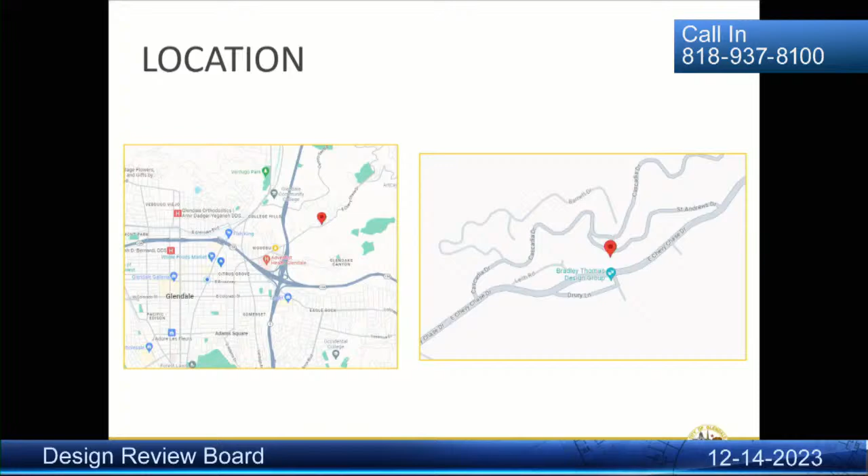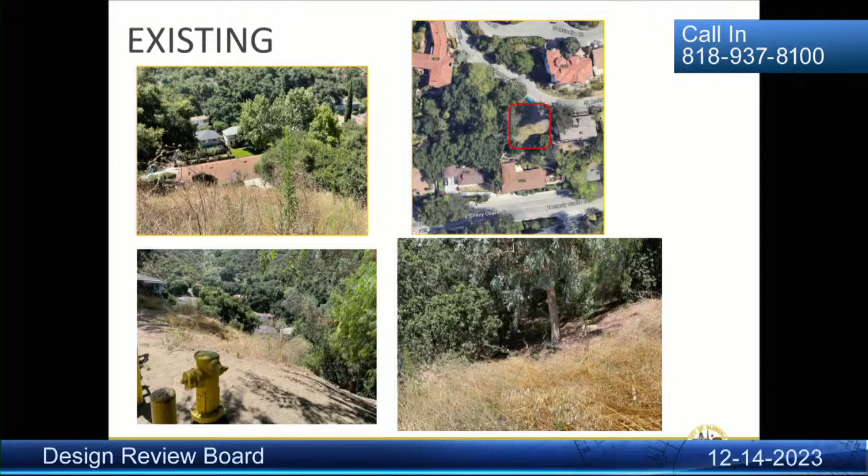As a refresher, the subject site is in the Chevy Chase Canyon of Glendale on St. Andrews Drive. It's an R1R zone, and the site has a variance to allow for construction on a substandard lot. The subject site is a vacant 6,708 square foot lot with an average current slope of 60%. It's irregular in shape and has several existing oak trees on the property.

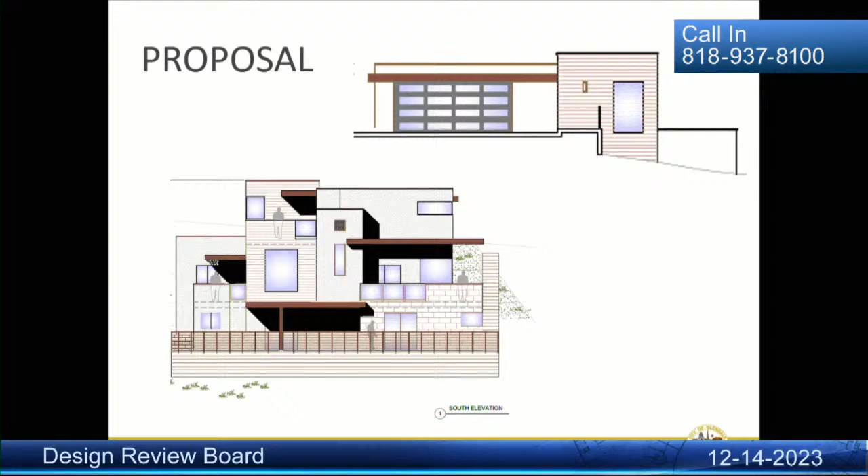The overall dimensions of the revised proposal are the same: one new 2,010 square foot, 3-story, single-family house with an attached 2-car garage. Site improvements involve grading 375 cubic yards of cut, 400 cubic yards of fill, 25 cubic yards of import, and 3,060 square feet of open ungraded space. There will be a 5-foot-tall retaining wall at the southern end of the property, and you may remember there were 3 to begin with. The project is exempt from CEQA.

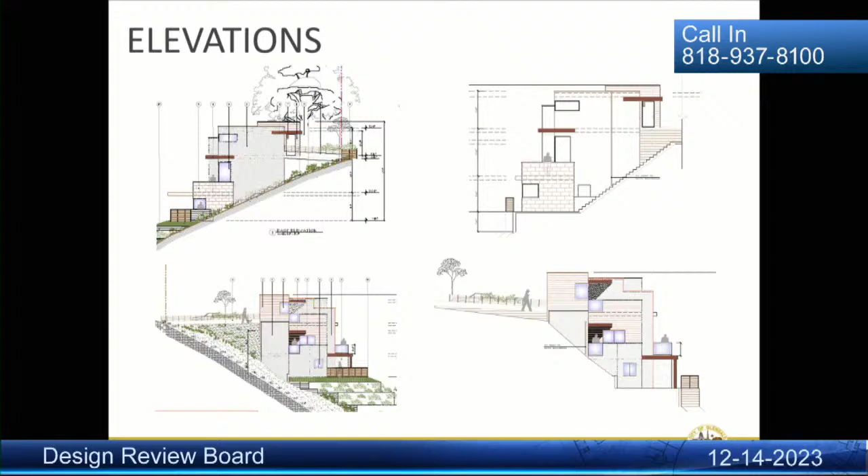The side elevations have no visible changes made. Here's a side-by-side of the previously reviewed floor plans and the revised ones. I know you can't see these in great detail, but this just shows that very little has changed in the floor plan.

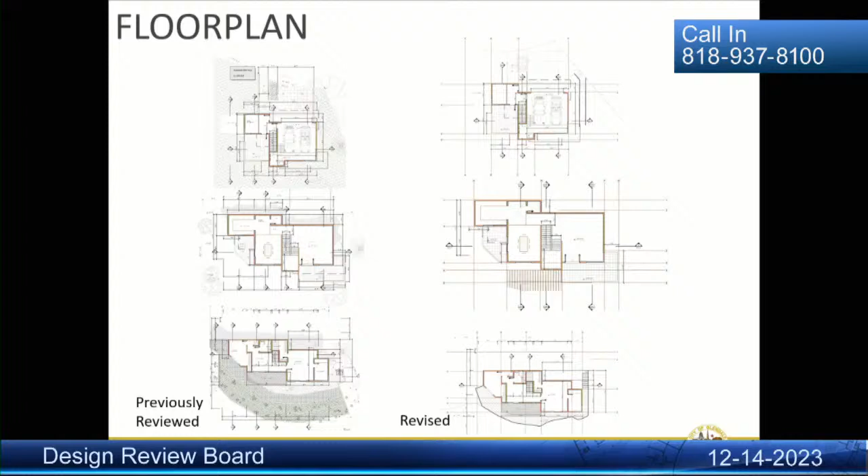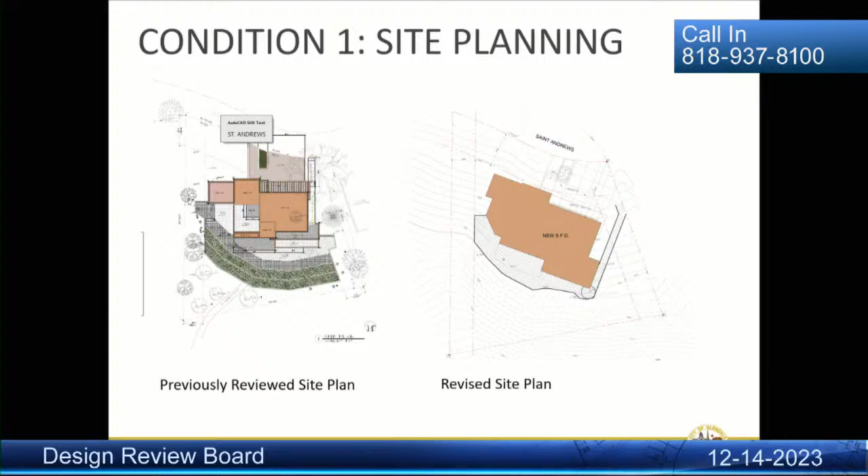We can talk a little about the first condition regarding site planning. The first condition was to rotate the building placement towards the street, reducing the grading and number of proposed retaining walls, and reducing overall mass and scale. Here you can see the previously proposed site plan on the left and the revised site plan. The building footprint has been rotated about 10 degrees towards the street and now sits closer to the 15-foot setback line. The grading plan has stayed the same, and here's the elevation drawing showing the reduction of retaining walls at the rear.

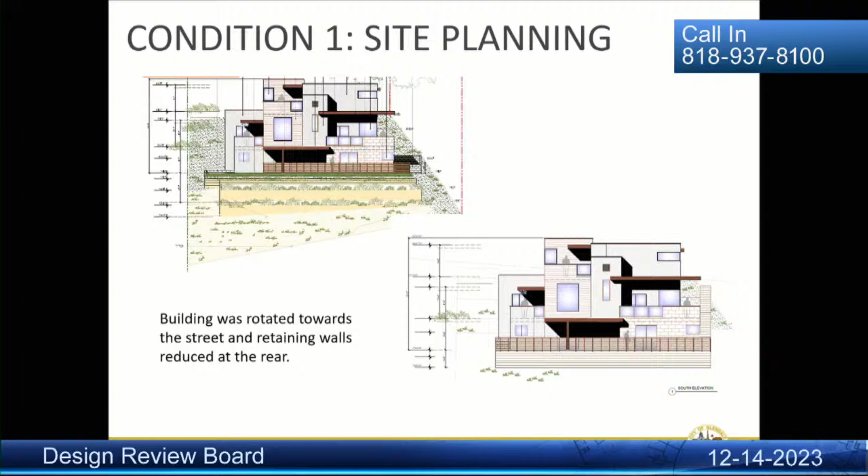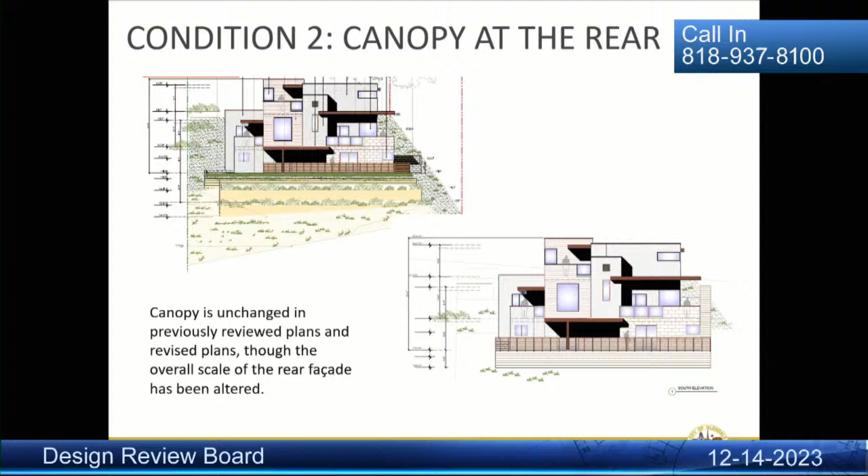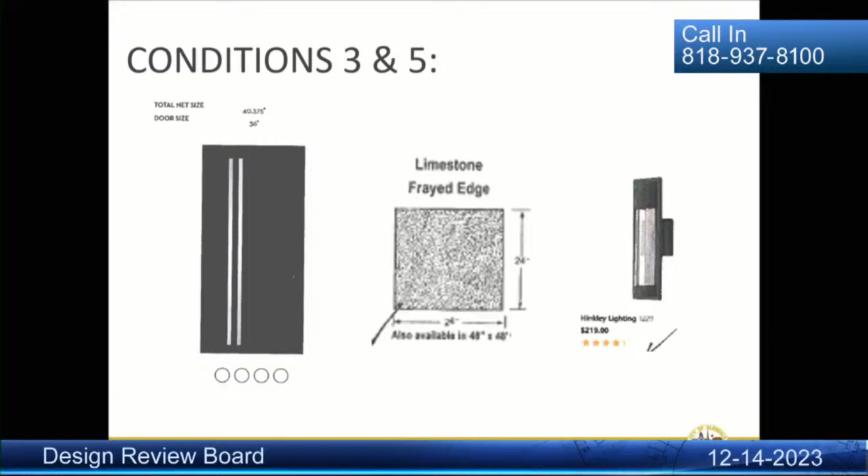Moving on to conditions 3 and 5, which were requests for cut sheets, we have the door here, the decorative paving, and the lighting. Staff included a recommendation to maybe choose a different paver material, but we believe those conditions have mostly been met. I did not include conditions 4 and 6 because condition 4 is the urban forestry condition, and it's standard to include that. Number 6 has not been addressed but can be met at staff level.

Which one was number 6? Number 6 was the gutters, yes — clearly depict gutters and downspouts on the drawing and paint them to match.

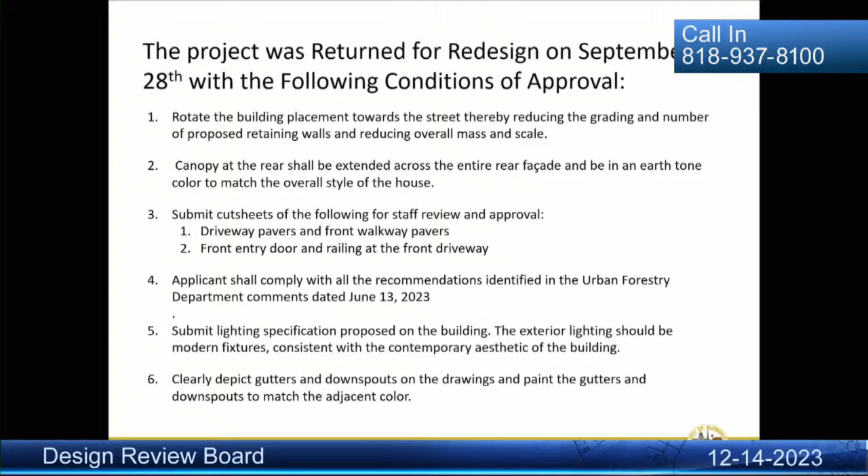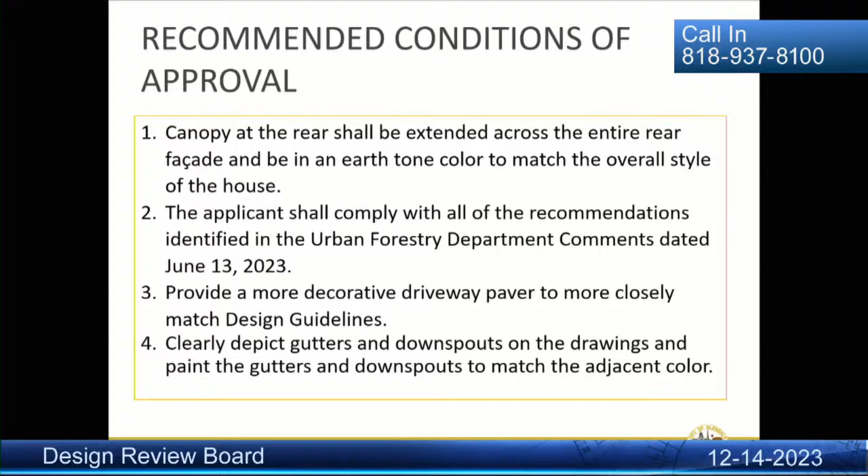We are recommending approval with the following conditions. Number 1 would be the same condition regarding the canopy at the rear, extending it across the entire rear facade in an earth tone color to match the overall style of the house. Number 2, the applicant shall comply with the recommendations in the urban forestry department comments. Number 3, a more decorative driveway paver to more closely match the design guidelines. And number 4, again, clearly depict gutters and downspouts on the drawings. That concludes my portion of the presentation.

Thank you. Do we have any speaker? You have a question? Yes, go ahead. Thank you, Mr. Chair.

With the new proposal, I didn't get the last figure. It was 375 cubic yards of cut — yes, I believe so — and 400 cubic yards of fill. What was the export with the new calculations? Let me see if I have it in front of me. 25 cubic yards of import and 3,060 square feet of open ungraded space. So 375 cubic yards of cut, 400 cubic yards of fill, and 25 cubic yards of import.

And with the previous submittal, what were those figures? They were the same. With all the retaining walls being removed, how could it be the same? Well, I think the applicant could explain this better than me, but I think he was planning on filling in the area where the driveway bridge was with some of that dirt.

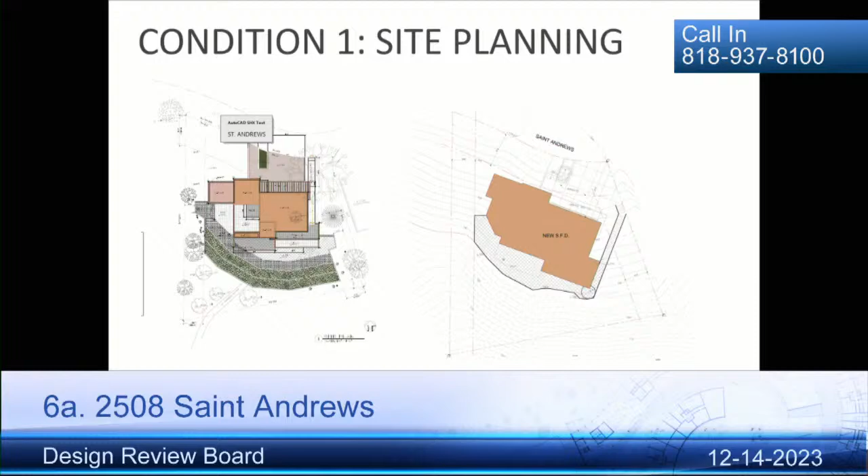On sheet 2.3, one of the plans staff had on the board had a hatched portion at the bottom — I think it was a comparison of the floor. So on the revised site plan on the right side, what is that hatched portion? I think that's the deck type area, the outdoor space. And is that area on grade, more or less? Yes.

In regards to the site plan that depicts the location of the house with the contours and spot elevations — I think I know the answer is no — has one been submitted with the new site plan, with the proposed design as rotated? No, okay. All right.

Thank you. Any other questions? Yes — perhaps it was in the original set of plans, but I didn't see a window specification listed. It is in the original set of plans, but because it didn't come up as a condition, I didn't think to include it, but I can pull it up if you'd like to see it. If it wasn't a condition before, I'm sure we evaluated that previously. Thank you. Sure. Any other questions? Nope, all right.

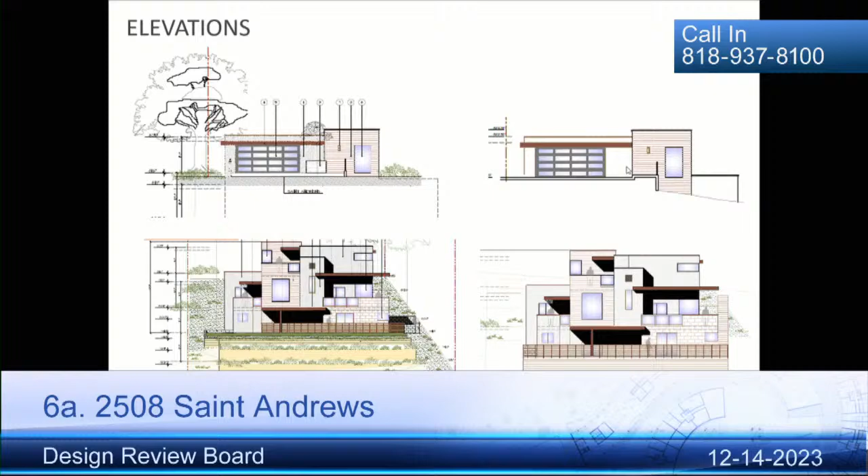It's a little hard to see. The flat roof shows the downspout right there. No, go a little further. Yeah, right there. That seam, that vertical line, is the downspout.

Okay, and you also mentioned the drainage is coming towards the house down the driveway? Yeah, it's a continuous gutter across the driveway. I'm sure that's something you'll explore with building and safety, but I'm wondering how you're getting the water up and away. That's one of the reasons why the building was sitting up, so it will avoid that.

And then in terms of windows and materials, they weren't provided in this submittal, but I'm assuming you're being consistent with what you provided previously. Is that correct, that they will be of the same quality and specifications? Okay, thank you.

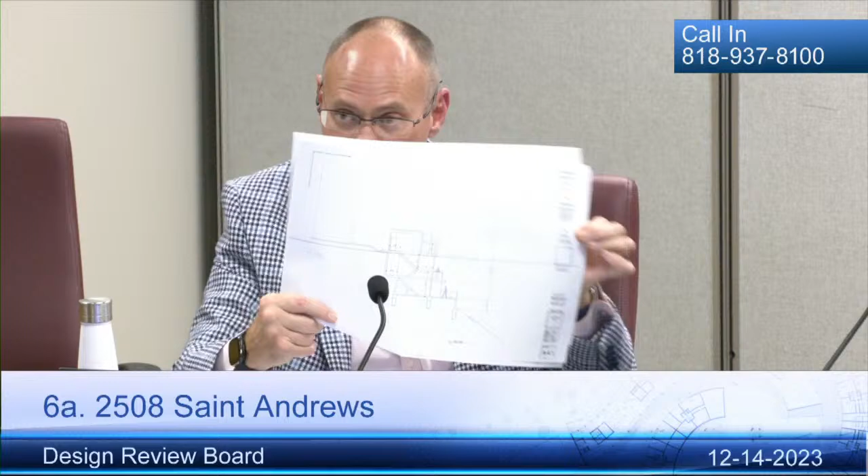This, I think, is the closest that we've got, is this section here that cuts through. But there's no dimensions on here in terms of elevation along the site, no lines showing the natural grade going through here so we can see where that would be cutting through the entire section.

Yeah, almost like you need a preliminary grading plan. To go to a civil engineer and ask for a preliminary grading plan, where they spot the top of wall and the bottom of wall. Understand what you're saying. I just want to point this out on comparative elevations, side by side.

The revised elevation, you see, it's cut right through. The only thing that is missing is the actual existing grade dash line as it cuts across the building. I mean, it could be anything.

That's what we're saying, for us to bring the only information on there is a preliminary grading plan by a civil engineer that locates the walls, locates the house, that does a cut and fill drawing with different colors, shows the cut, shows the fill, shows the import, shows where the dirt's going, actual tabulations, cubic yard calculations of how you're storing the dirt.

It's work. It's not just taking the elevation and a section and saying, this is it. It's depicting the data on a set. And that's what we asked for last time, and I could tell there was some miscommunication because you're still asking questions as to what we're looking for.

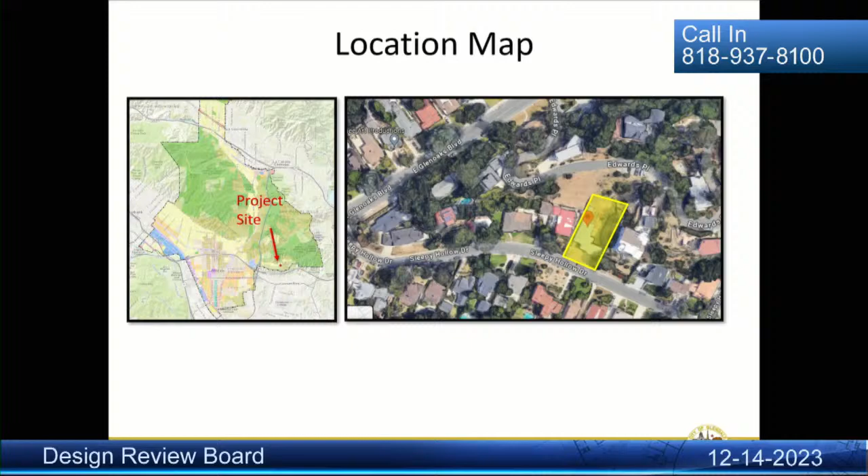The applicant proposes to demolish the existing one-story single-family dwelling and construct a new two-story, approximately 3,400 square foot single-family dwelling with an attached street-facing two-car garage. At the rear will be a detached 749 square foot accessory dwelling unit, which is not under the DRB's purview this evening.

Overall, the building's site planning will comply with all setbacks of the R1R development standards. Overall, the site plan is supportable by staff with two recommendations. The first being that a landscape plan be provided for staff review before building and safety plan check.

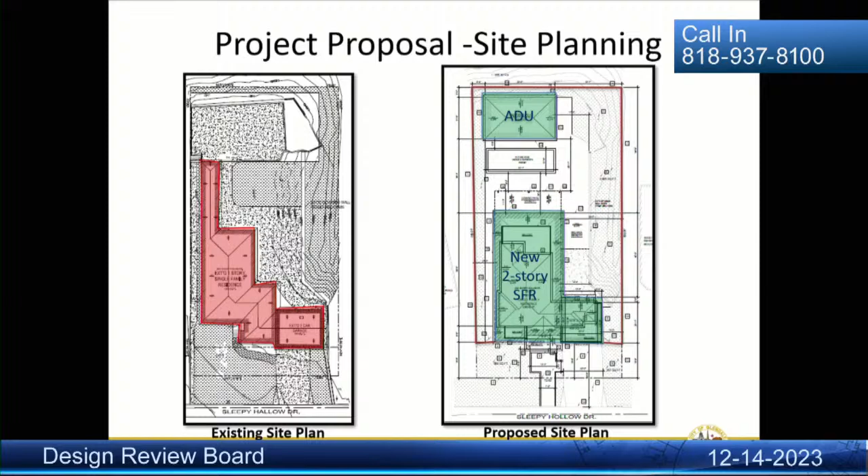The second condition in terms of site planning, as you may notice on the screen highlighted in red, there will be a perimeter fence around the lot. It's a wooden fence. Staff recommends setting back the street-facing portions approximately 1 foot from the building's facade. Just to give you a visual of what I'm trying to clarify, this is the rendering, and they have the fence there.

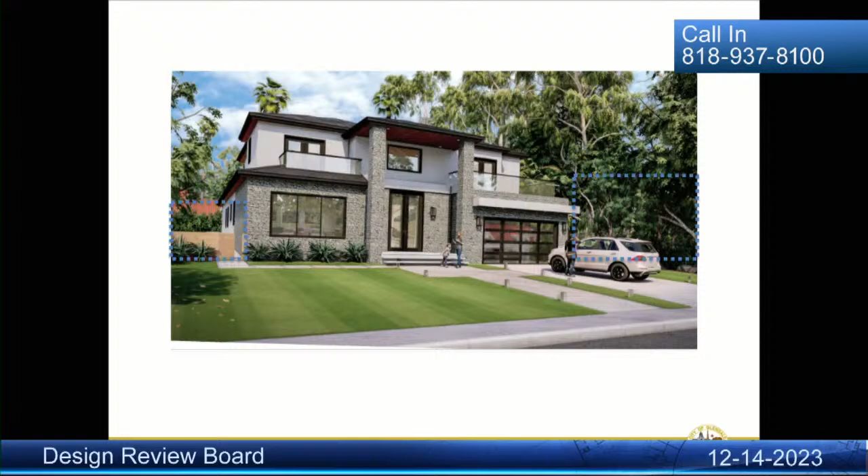Even though the rendering does show a very short wall, I imagine it can be taller. Staff is just recommending to set back these fences - on the driveway side they're not showing the fence, but we'd set this back maybe a foot to break up that elongated long wall of building and fence that would be viewed from the street. So staff believes just offsetting it from the facade would help break up that appearance.

Moving on to mass and scale. Overall, the mass and scale of the two-story is supportable. The neighborhood consists of a variety of both one- and two-story homes.

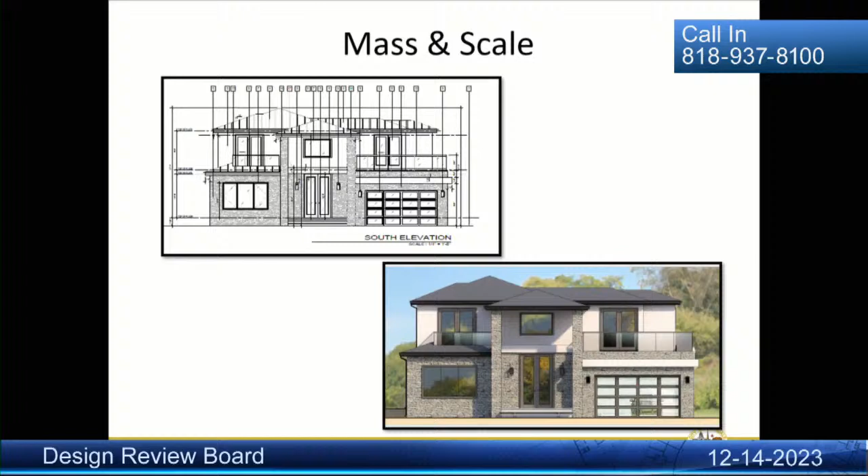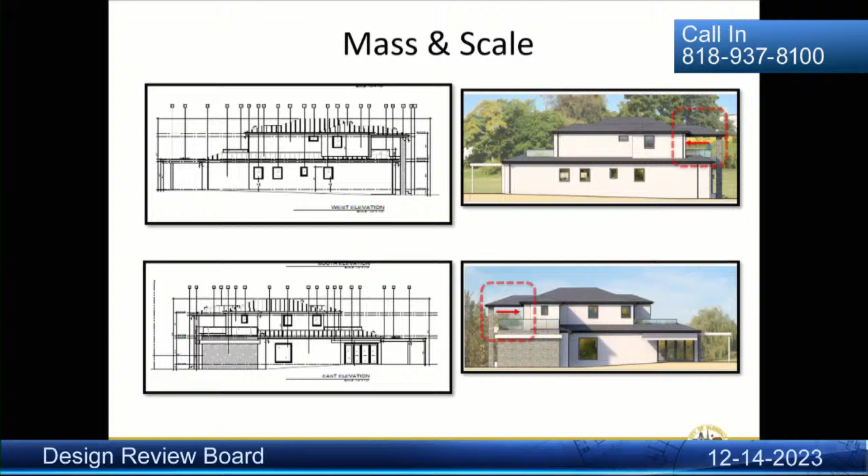To help reduce the mass of the two-story, as recommended by the guidelines, the second story of the building will be set back approximately 6 feet from the lower level. You can see from the arrows outlined in red here where these offsets are provided. Once again, this is about 6 feet - I think the dimension would be at its closest, but 6.5 feet offset from the lower level.

Onto the project's design in detail. The project's contemporary modern design will include quality materials such as a standing seam metal roof, stucco siding, stone veneer base band, and recessed nail-on fiberglass windows with fixed casement operations.

However, staff has 3 recommended conditions. The first, if I can guide your eyes to the slide here, involves the 2-story front entry, which is discouraged by the guidelines. Staff recommends lowering the front entry and the front door to be properly scaled with the design and avoid the sense of monumentality that the guidelines recommend we avoid.

The second recommendation is that the brick veneer continue and wrap around the corner along the western facade to terminate at a more logical stop, which would be towards the rear. Lastly, the applicant should show locations of the downspouts of the project, as this is pretty standard for us, and we believe we can handle this during plan check.

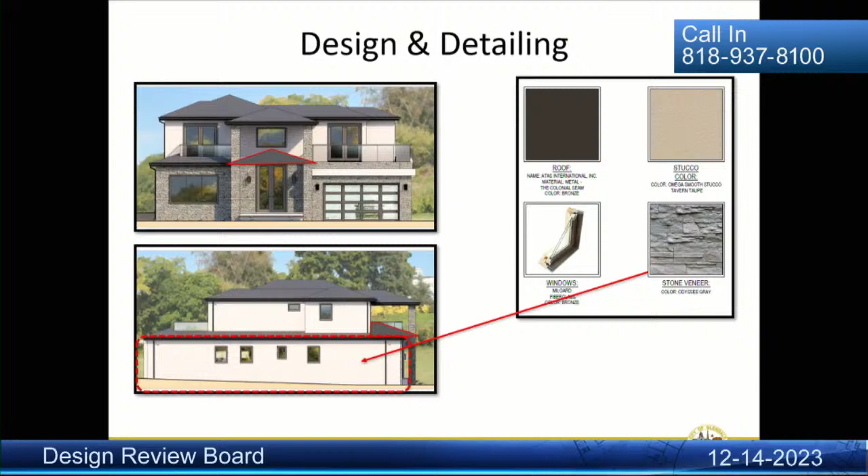Overall, staff recommends approval of the following conditions. I will briefly go over them. First, lower the front entry cover and have the front entry door properly scaled.

Second, set back the fence from the building facade to break up the long continuous wall with the combination of the fences and the building.

Third, which I didn't mention but you may notice in the rendering, paint the fence a darker color to complement the tone of the building, in lieu of the natural light color stain you may see. I know it's a small photograph here, but I can enlarge the rendering.

Number 4, have a landscape plan prior to plan check, and these plant materials should be California friendly. Number 5, wrap the brick veneer along the western facade and terminate it at a more logical location.

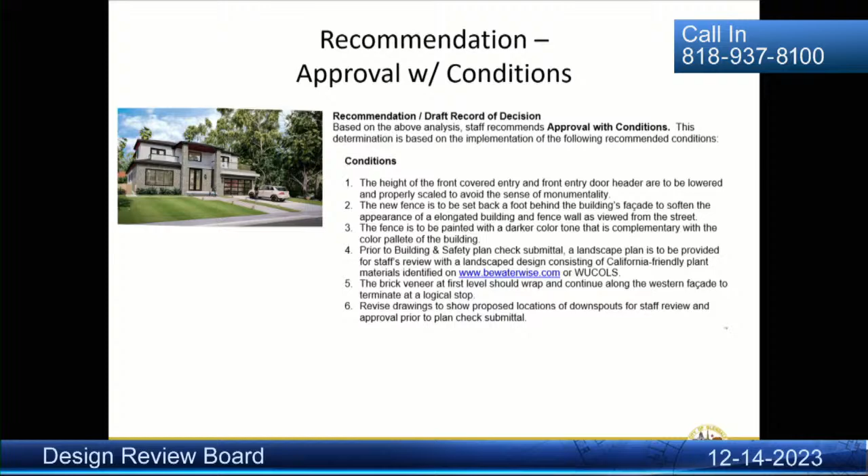And then number 6, the ever-perfunctory condition: identify the downspouts for staff's review prior to plan check. This concludes staff's presentation.

Thank you. Any questions? Just one — on this rendering I see on the front page, the stonework does appear to go down the side. So we're really just trying to make it look more like that one, correct?

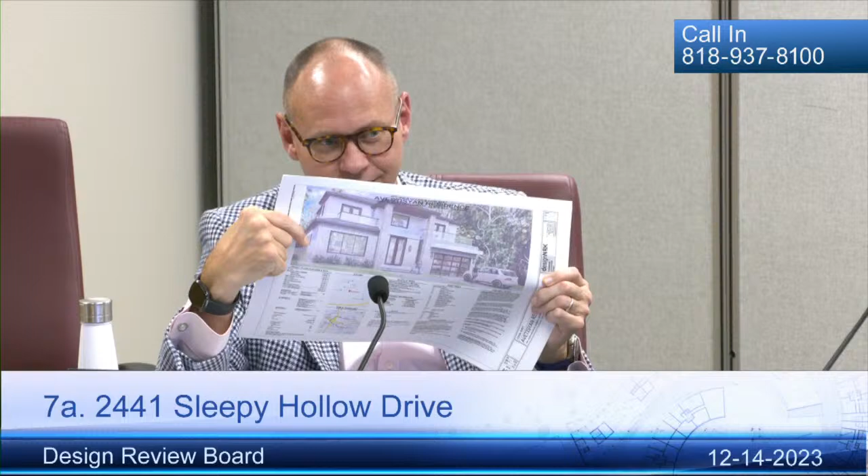When you go to the architect's non-colored renderings, they indicate stucco. So yeah, I kind of referenced that one there, and not to be too nitpicky — in the rendering you showed, it doesn't terminate at a logical stop either, because it stops mid-plane.

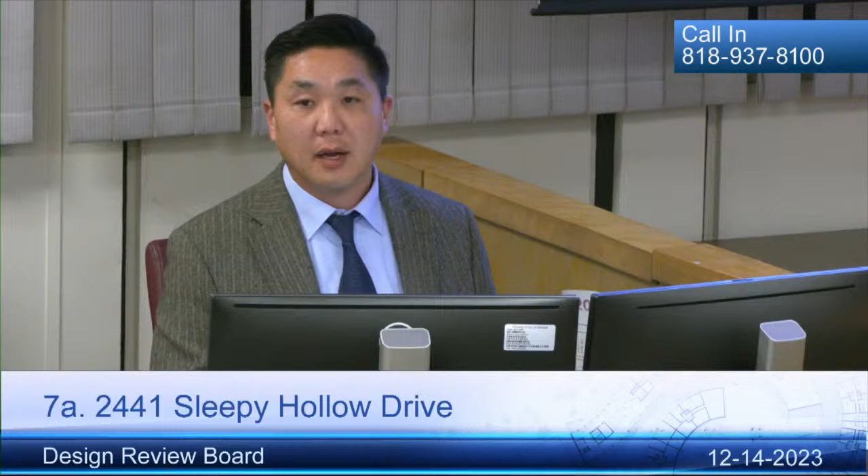If you think that's sufficient, we can proceed with that. But staff's recommendation is something in line with our guidelines, to have that logical stop, either at an inside corner or outside corner, out of public view.

Any other questions? Board Member Lockroth? I have a quick question — there's an overhang at the garage, kind of linear. What is the function of that? I wanted to check in with you. Is it purely aesthetic or something else?

The way staff looked at it, I think it's just a brow, an architectural feature. Although I don't know what the material will be — I imagine it might be stucco because it matches — but that's maybe a good question we can clarify with the applicant. Thank you.

Board Member Simonian? Yes, I had a quick question regarding the existing retaining wall that's under a separate permit. Is that already built, or is it just already permitted and will be built during construction? It was already permitted, yeah.

Okay, so will it be built during construction? I think it's already built, and they're going to keep it. Okay. I haven't walked to the back, but we can verify, because I believe from my recollection of looking at the permit research, it was permitted in the past.

Even if you look at Google aerial views, you can see the lowboy dumpster at the front, and I think they were excavating when you look at it. So I think it's already constructed, but yeah.

And in regards to a natural termination of the stone veneer on the west side — if, let's say, the office popped out or popped in, would that make any difference? Because there's about a 10-foot setback.

If it popped out a foot into the setback area, are they kind of at the limit of their FAR or approvals, et cetera?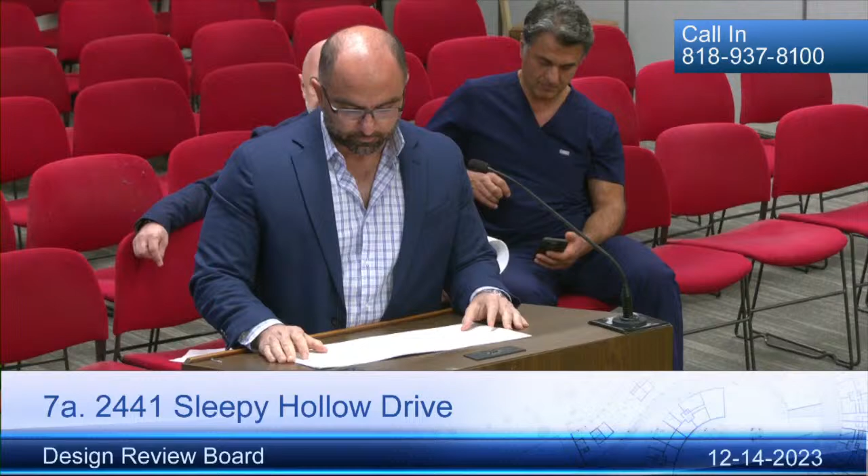Good evening, Board. My name is Narek. I'm the project designer. We're okay as far as all the conditions that Dennis stated.

The landscape plan is fine — we'll get that from a landscape designer. Wrapping the stone on the side, we're okay with that too. There's a window — we can stop at the window,

or after the window. And the retaining wall was built and finalized, so that's been done already.

The brow over the garage door, that is smooth stucco. It's decorative.

And I think I do show downspouts and gutters on the plans too, so I think that's on the rendering, the color renderings. Yes, it's on the color rendering.

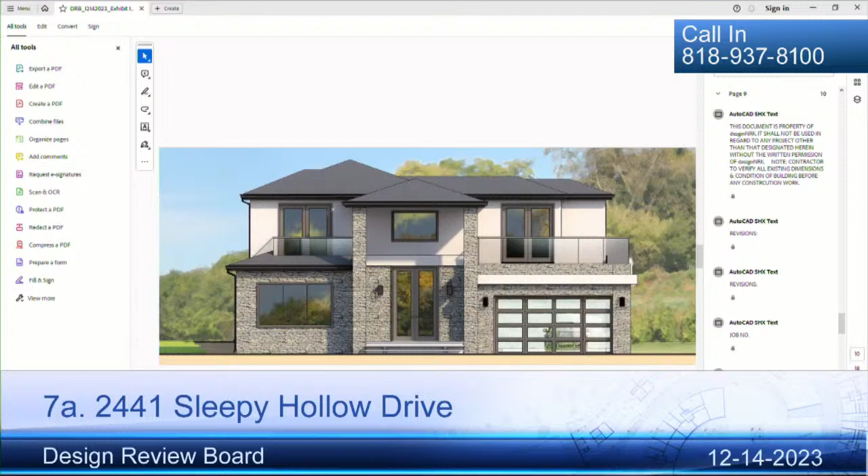We would love to keep the entry high. I did go through the neighborhood and took a bunch of pictures, which I think Dennis gave you guys. It does match some of the homes in the neighborhood. There's a lot of two-story homes, a lot of these two-story kind of massing that goes from first to second floor.

So there you can see, those are all on the same street, Sleepy Hollow. I'm going to start at the top. And then, you know, the house is actually right next to a castle. So as far as massing, I think we pretty much fit in the neighborhood.

I think that's it. Okay, any questions for the applicant? I do have a question regarding the condition. I know that you do want to keep that entrance higher. But how would you address that condition? Should we be in agreement that it does need to be addressed to meet design guidelines?

If it does need to get addressed, it would probably come down maybe over the front door. I have a 10-foot door and another pop-out, similar to the garage pop-out, right on top of it. So would the roof, for instance, continue over? Correct, yes, something like that. Okay, thank you.

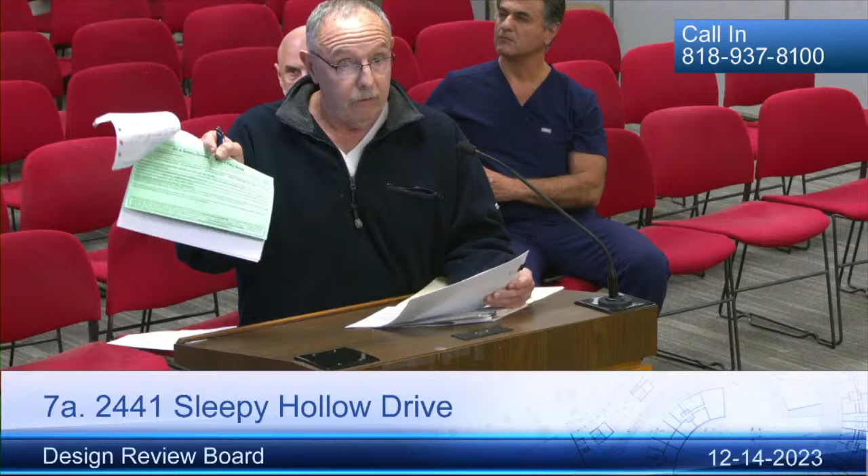The first part of the statement, I presume, is supposedly for the entire lot. But this seems like a contradiction in that it has a second building home that they want to build on it with an ADU unit attached to it.

Could somebody clarify that? So to answer Mr. Fred Stifter, I believe your last name was, there is an ADU in the back, but however, ADUs are not under the purview of the Design Review Board per state mandate. It will be back there. They can propose it with a brand-new home, but the ADU will be accessory to it. The board doesn't have any authority over its design. If it complies with its four-foot setbacks and it's under 800 square feet, it meets the criteria outlined by the zoning code. It's ministerial.

Could somebody please explain this sign then that is out in front of the house? Because it appears as if there are two homes proposed, and one of those homes will have an ADU, and one of them is this larger home. Would you mind if I read that? Happy to give this to you. Please, thank you, it's a picture of the sign that I took in front of the house. I have another copy for you if you'd like.

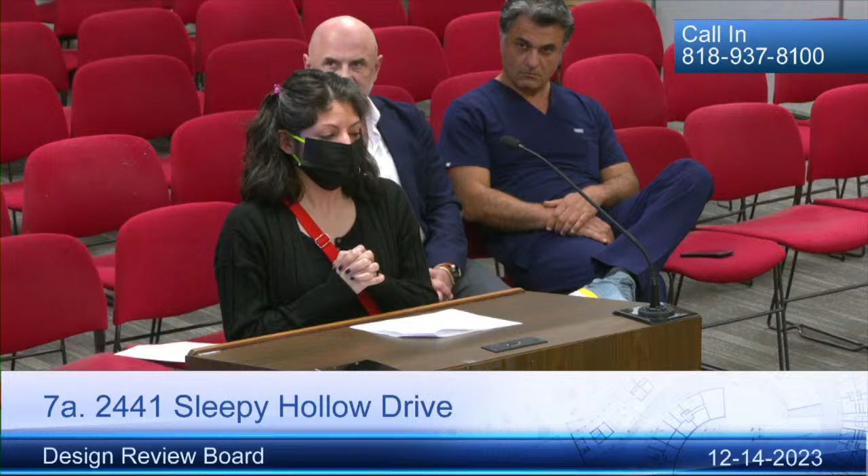Maybe it will be a different crew, I'm hoping, because these guys started way before 7, which I know is the noise ordinance. They'd have large trucks just idling, and then they'd be dropping dumpsters, and there was trash everywhere. The place looks like a crack house. The front is just horrible. And our neighbors, we all just say it's so junky there, it makes us all look bad.

So I'm hoping, like my dad was saying, that laws give us more control over that. Maybe someone, contractors overlooking it — I don't know, because it seemed like no one was overlooking it the last time. It was just very kind of weird and shady. So that's why I contacted.

And then also with the building itself, the architectural plans — I know they're saying everything is really big around that area. That's not really true. He showed pictures of the newest developments, called the Reserve, which are at the top of the hill. For our area, yeah, there's a castle there, we call it a castle, it's been there forever and has a really cool story. For the rest of the homes, they're not large around, so I find that kind of odd. I just want to point out, it's going to look really odd, it's going to be an eyesore. My opinion won't matter.

I just want to say it's odd, nothing is like everything's big around there - that's not true. It's surrounded by smaller homes, older homes. So that's all I want to say.

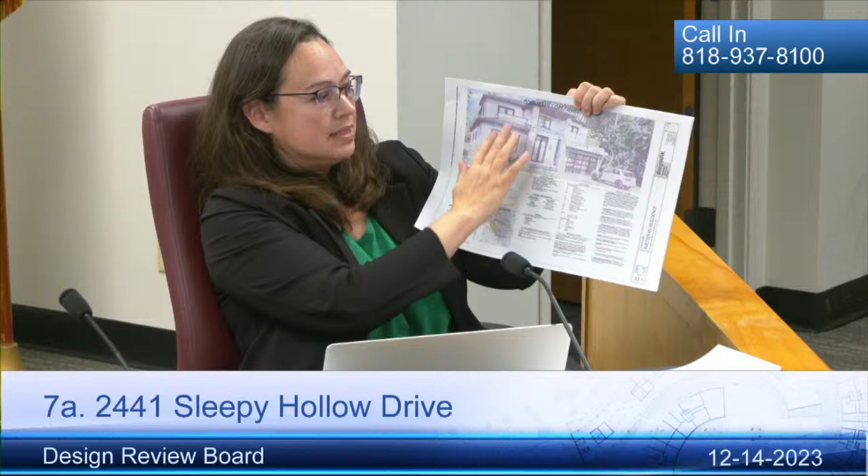That was really helpful, that they're willing to step back on that corner, and for me that would be sufficient. I don't think we need to get rid of the glass railing, given that it's transparent - that's fine. I do feel strongly, though, that having the roof line continue at one level is going to be a really nice asymmetrical appearance that's going to bring down the massing of the home. So I would like to be more specific on that condition.

I'm not opposed to the door height. So in your mind, it would be bringing across the standing seam roof, as opposed to that stucco element above the garage, across, right? Correct. Yeah, I concur.

And so it seems like there's consensus on all that, mass, et cetera.

In regards to the stone veneer turning the corner, there's one option, as staff and the chair have mentioned, moving the fence back and terminating the veneer at the fence. If it's 4 or 5 feet, maybe the fence would line up with the bedroom above, and the veneer would come here. Another option would be to take it all the way, line it up with the building mass above and with the window, which I think is what the architect was mentioning.

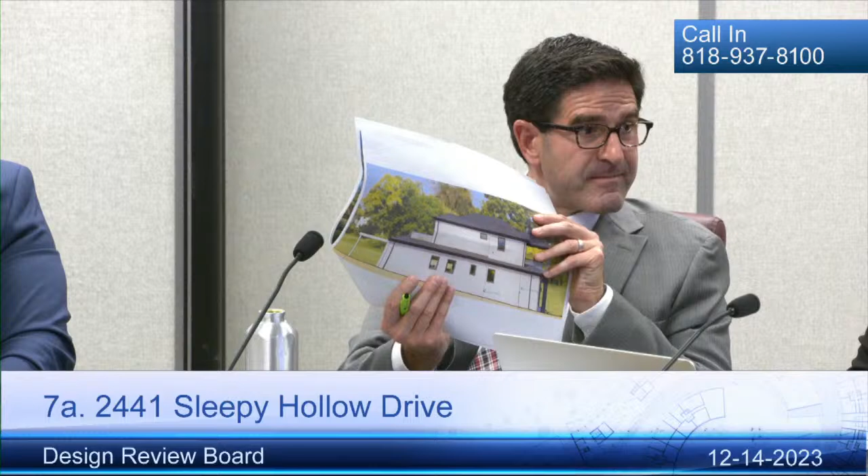So that would be my motion. I second, with Board Member Simonian's friendly amendment there. So just for clarification before I take roll call, I'm hearing that an additional condition is applied to reduce the mass by setting back the second level floor by an additional 2 to 3 feet.

That would be the entire second floor? No, just the west side, the left-hand side. Let me get back to it—it would be the bedroom and the stair above the front entry. So looking at the— I apologize, I'll get there.

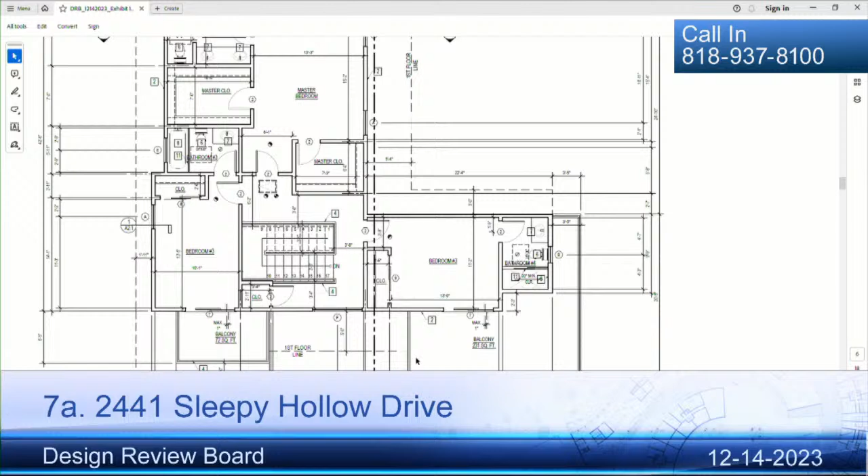So this is the second floor, that's the first floor. Reduce the floor line at bedroom number 3, as well as the staircase and hallway. It would still say bedroom number 4 next to the bathroom, so it would be the western bedroom number 3, and the staircase volume, but the other bedroom number 3 would remain.

I'm sorry, the eastern bedroom number 3 would remain, correct. And the staircase would remain in the exact same location. So it's just that facade wall right in front of that stairway hallway and that bedroom that could push back—basically elimination of the closet and moving the exterior wall to align with the southern wall of the stair, then moving that line over and clipping the bedroom. So this would jut in here, and then it would recess going across this way.

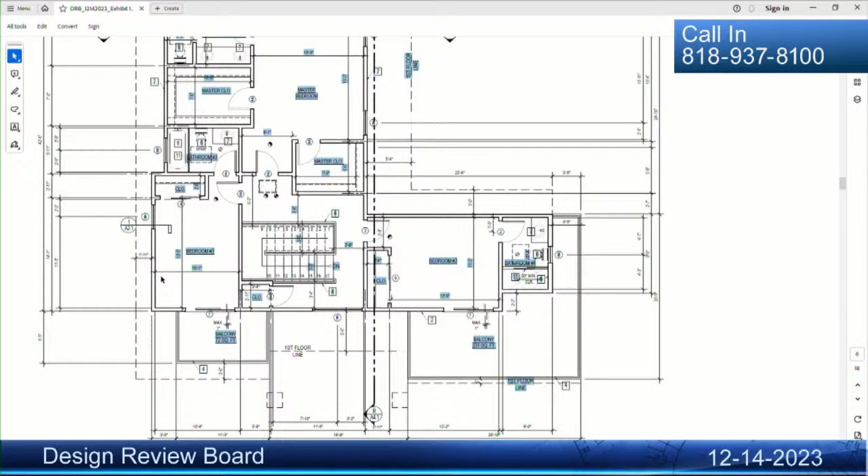Yes, so there would be about 2 feet 11 inches of additional setback on the second floor as a condition. In the red area, it would be out—sorry for the very thin line—this area here.

Okay, thank you. In regards to the balcony, we're amenable to keep them. I did hear something from Board Member Lockhart about, I think above the garage, the brow. Are we saying we want to get rid of the brow and have the veneer terminate at a standing seam roof? Actually, the brow I'm not disputing—I just think the standing seam roof above the corner of the building should continue over the entrance, so it's consistent and helps bring that entry height down.

Yeah, and I think we're in agreement that the door height could stay as designed. So the door height—this is just for me, when I do see revisions of the plans with the applicant, I want to be very clear with this, so I appreciate your additional time. When we lower it, the head height of the door can still be up to the header above. Are we imagining this with my amazing animation here? Which was very good, by the way. I like that—the front entry.

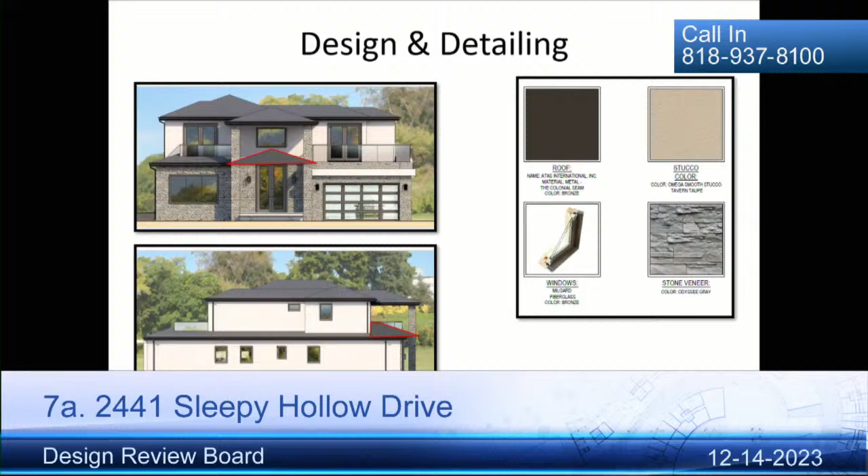Now we're going to expect this every time. Do the interactive thing, Joe. It would be somewhere in line here—this is what we're talking about, not somewhere in the middle or in between. Are we talking about this when we say lowering it? In my understanding, the line of the roof above on the western side would continue along there, in the same manner, not necessarily a triangular shape. Got it, thank you—so that it looks like one roof, in essence.

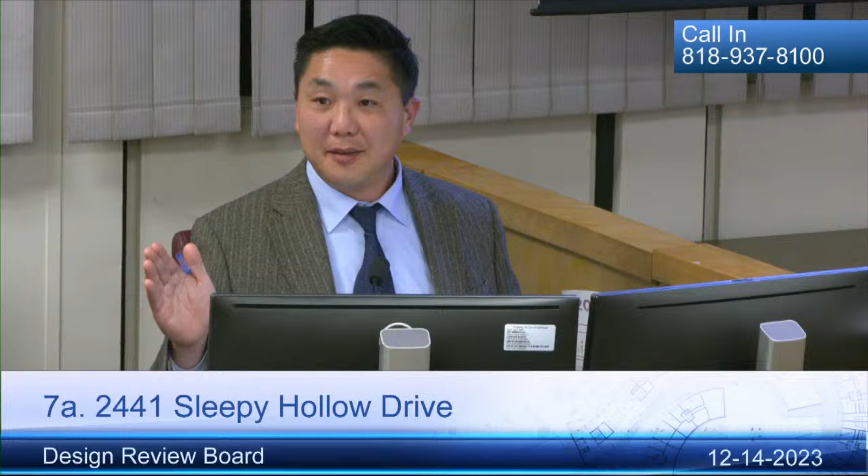With these added conditions and clarifications, also an amendment to condition number 5 to terminate the cladding at the second level recess, or that inside corner, to terminate at that location. This will be roll call. Thank you very much, board members.

Board member, the motion—I didn't write it down. I believe that was a motion by Board Member Lockhart and a second by Board Member Welsh. This will be roll call. Correction—made by Board Member Welsh and seconded by Board Member Lockhart. Correct. Thank you.

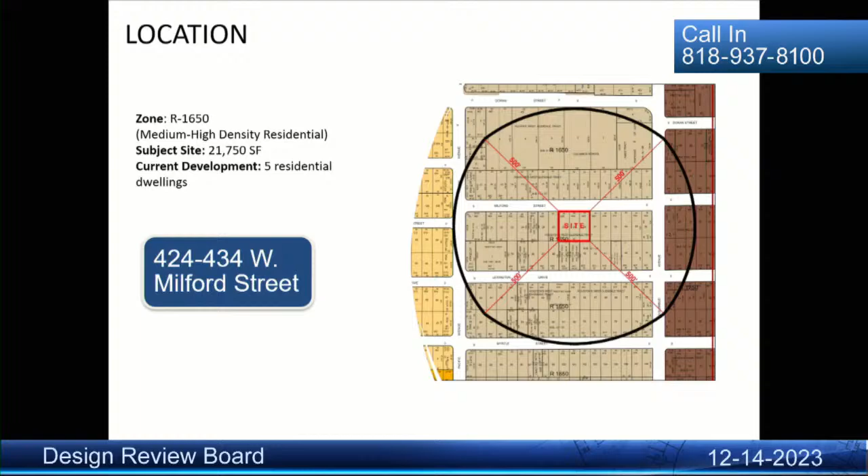In terms of the demolition, the existing structure at 424 West Milford is developed with 2 units, a front house built in 1922 and a rear house built in 1920. 430 Milford is developed with 2 units as well, front house built in 1913 and rear house built in 1953. And 434 Milford is developed with 1 single-family residence built in 1920.

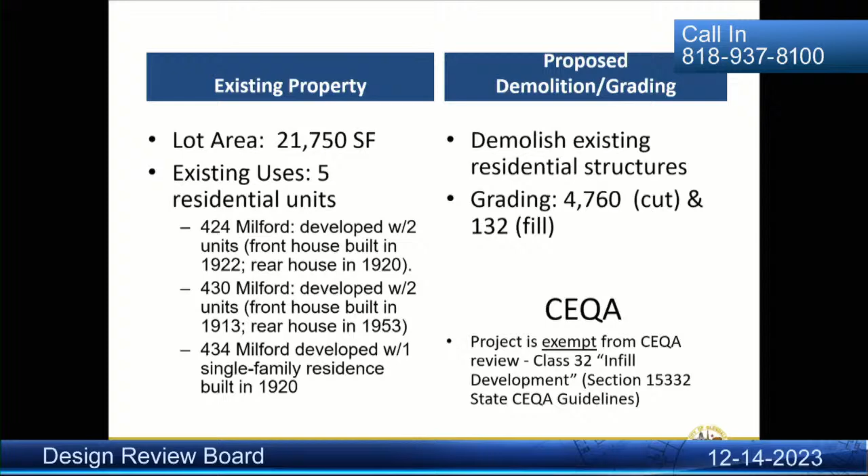Grading for the property involves 4,760 cubic yards of cut and 132 of fill, and the project is exempt under a Class 32 infill exemption per CEQA guidelines. Again, the applicant is proposing the construction of a new 4-story multifamily residential housing project involving a density bonus with 43 residential units.

Floor area is 30,665 square feet total. The density bonus request and affordable housing component was originally approved by the city council in April of this year. There are 8 units restricted for very low-income households, and parking is provided on site with 36 parking spaces in the form of an underground parking garage.

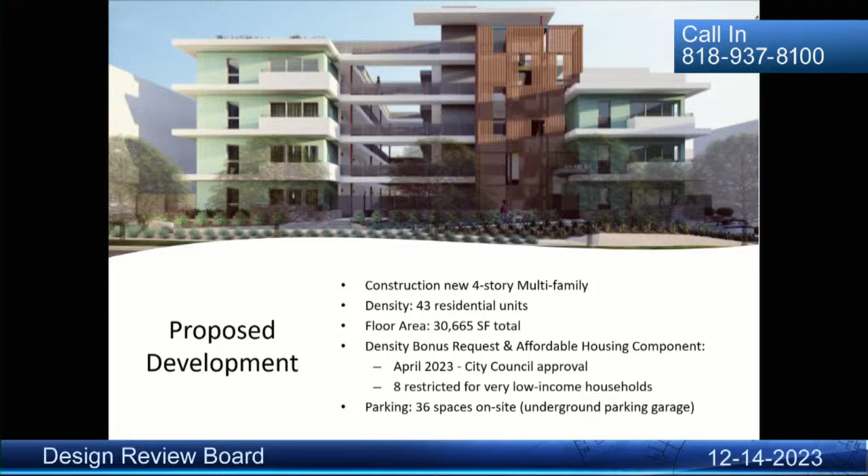Just by way of background, in terms of some of the concessions associated with the density bonus housing project per density bonus housing state law — based on the level of affordability, the applicant was entitled to 3 concessions. In this case, they received a concession to increase the maximum allowed FAR, floor area ratio, to increase the maximum allowed building height and number of stories, and to not provide the required additional open space.

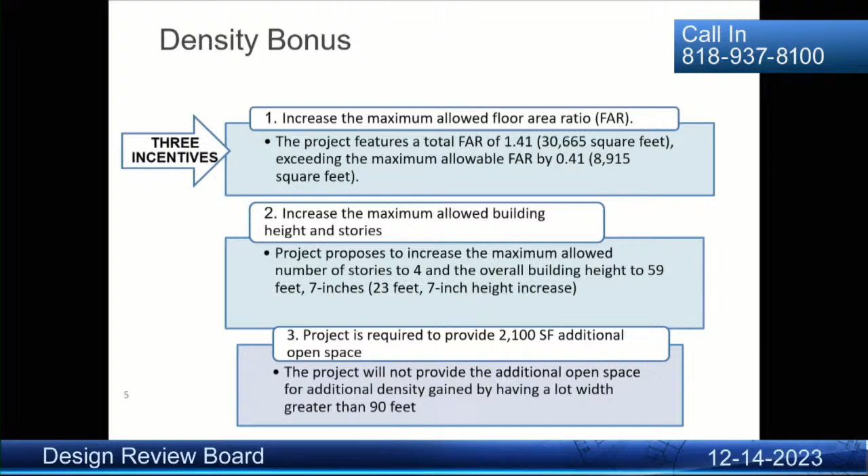So the project features a total floor area ratio of 1.41, exceeding the maximum allowable by 0.4. The number of stories per code would normally be 3, but in this case the concession was to allow 4 stories with an overall building height of 59 feet, 7 inches. Lastly, to not provide the additional open space that is gained by having a lot width of 90 feet or minimum width — but again, that was already part of the density bonus approval.

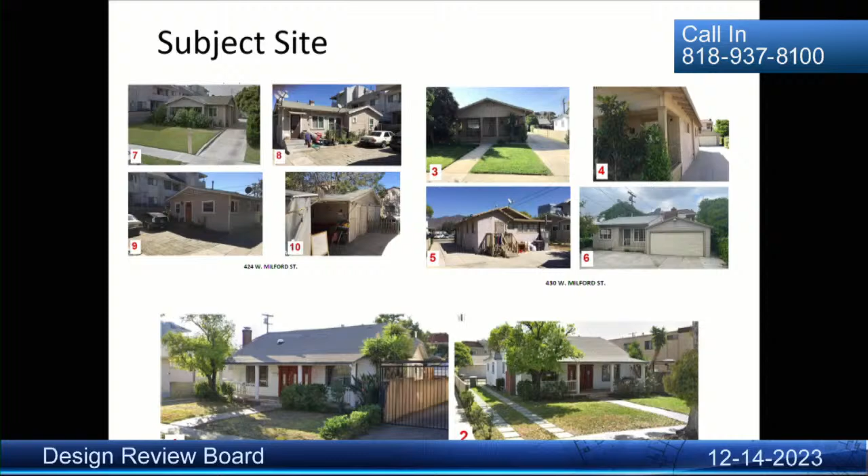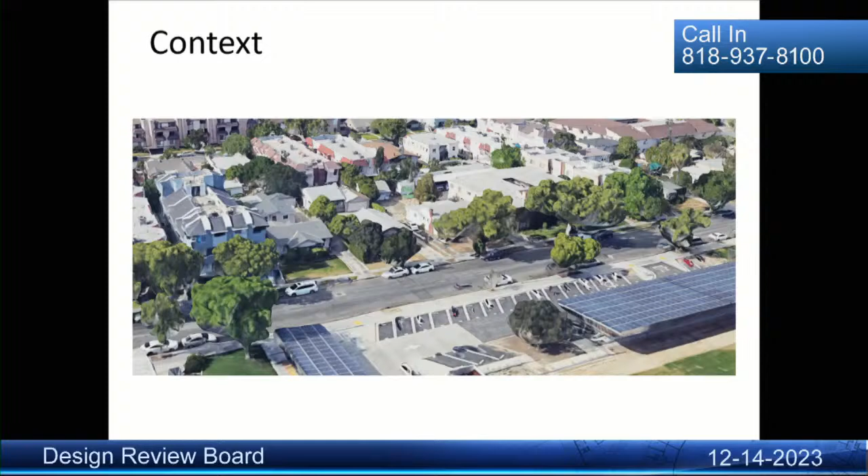These are some photos of the existing properties proposed to be demolished as part of the project. A little bit of site context: we're in the multifamily zone, there's a public school across the street, and on either side of the property there is multifamily development, multi-story multifamily development, and to the rear as well.

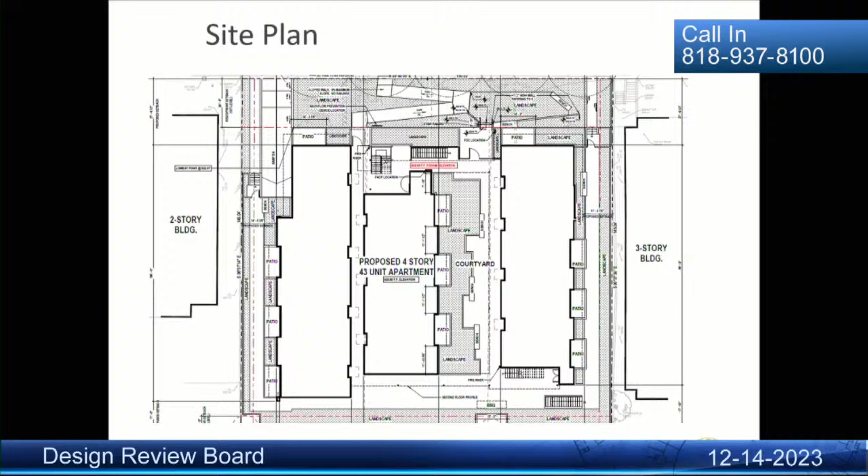This would be the proposed site plan for the proposed project, which involves the building with a courtyard in the middle. The buildings on the left side of your screen are more connected. There's a courtyard off to the side, but it's all connected by way of the walkways. Access to the parking garage is along the east side, with ramps to the site from the sidewalk.

The parking garage—I won't go into too much detail, you have this information in your packets—but again, they are providing parking on site with 36 parking spaces. We'll jump straight to the design of the building, which is a contemporary, modern design, featuring different design detailing consistent with contemporary architecture, a variety of forms and volumes, and a mix of colors, which you can appreciate in the material palette included in the packet.

This variety of the playing of volumes and materials again enhances the building. The building's proportions are appropriate to the site and relate well to the site in the neighborhood. The front facade is appropriately articulated through the use of color, fenestration, cladding, and roof design, which is identified throughout the structure. So a lot of playing of different colors and materials can be appreciated throughout the building.

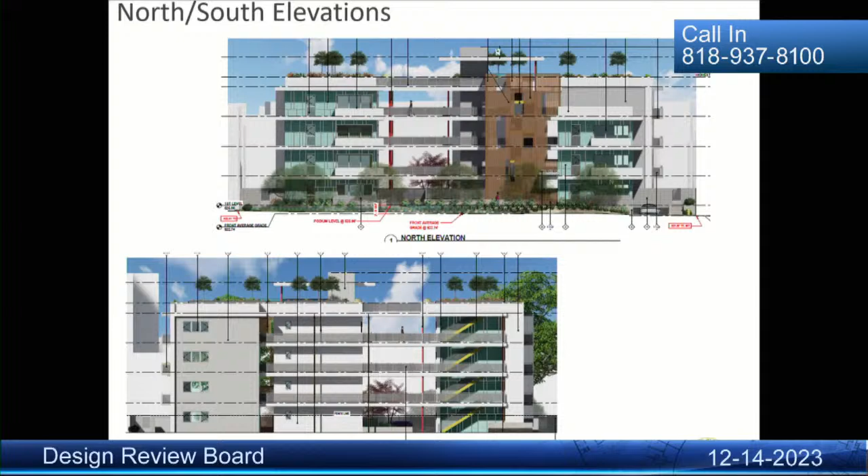Same concept for the sides, a little softer in terms of the use of materials, not as much as compared to the front, but more clean kind of design for the sides. But as we can appreciate, the materials do wrap along the sides, so you could see on the west elevation as well as the east elevation. There's some continuation of that material, terminating at a logical location.

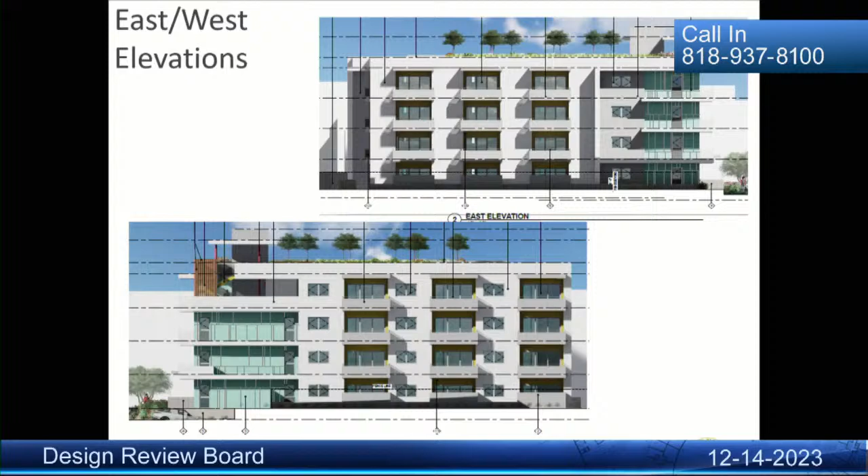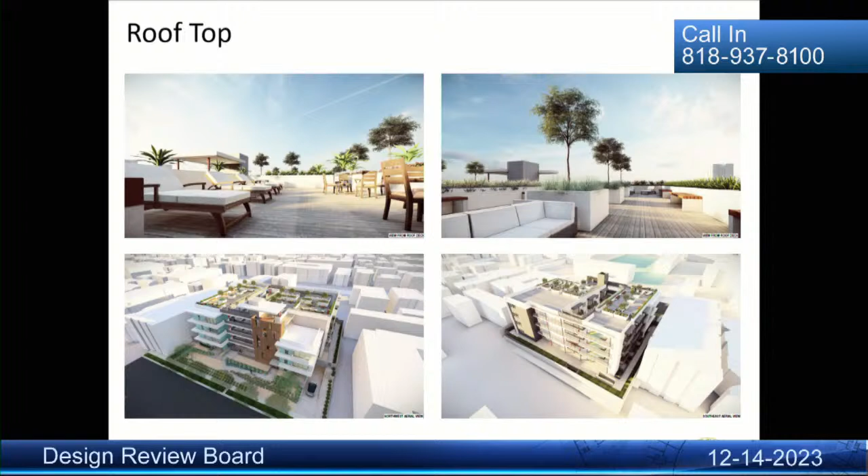I would also like to incorporate some of the interior facades of the interior courtyard views that are included as well, and the roof deck that is being proposed, in addition to landscaping on the property and open space in the interior courtyard. Additional open space is being provided on the rooftop. And these are the different colors and materials being proposed, along with the design detailing of the walls that are being incorporated into the design.

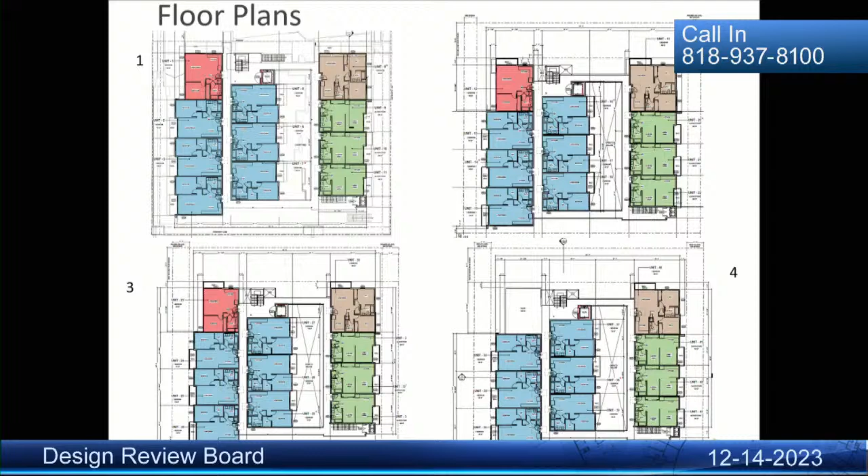Floor plans, I won't go into too much detail, but that's in your packet. I'd like to just jump into some of the suggested conditions that staff has included. We are recommending approval with the 5 conditions outlined in the staff report.

More general comments regarding providing cut sheets for all the site lighting and light fixtures on the building, and showing those proposed site lighting locations, including in the common areas and on the building, for staff review. Also to identify gutters and downspouts if there's an internal drainage system, for that to be clearly noted. There are some concrete benches at the front, but that's more of a zoning item, so staff is suggesting those be relocated outside the front setback. To submit window sections depicting a typical opening in a panel-cladded wall and cement wall, and lastly, to provide details of junctions when the materials intersect.

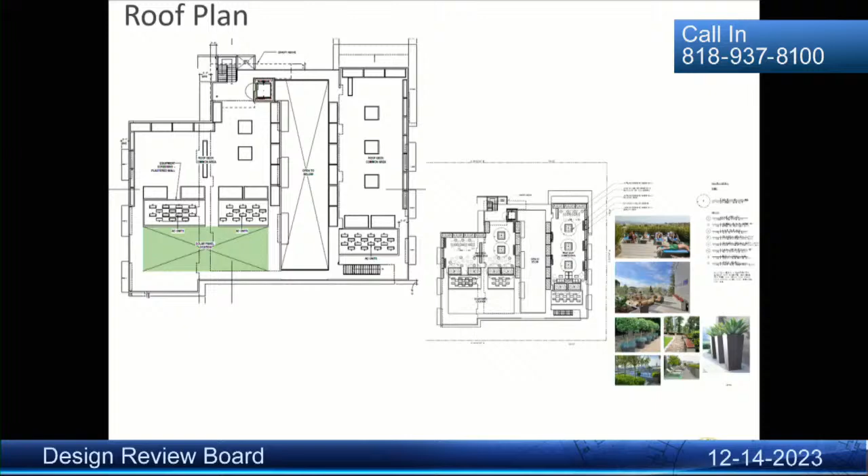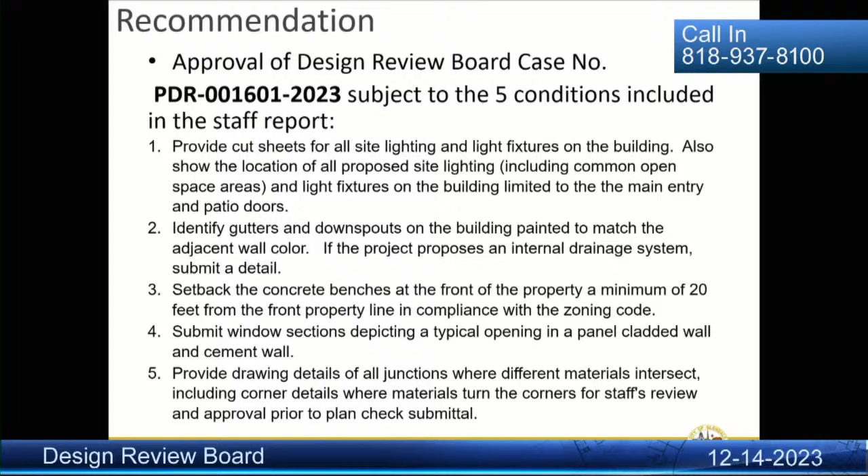And this is the landscape plan that provides drought-tolerant landscaping, again enhancing further the design of the building. That would conclude my presentation. I know the applicant also has a PowerPoint with their presentation, but if you have any questions, I'm available at this time.

Thank you, any questions? I know this is not exactly our area to adjudicate, but the density bonus that was done here, as I understand it, the state provides a minimum that we have to do 50% for the applicable here, but this is 152%. How did that happen? So that's why it was approved by the city council, because it's discretionary at that point when it exceeds that 50%. So in this case, it was a discretionary approval the city council made. Is that common in Glendale? It has occurred, it doesn't happen very frequently, but it has. I haven't processed too many with discretionary requests, but I've done a few, and it doesn't happen very often.

This may be a question for the applicant, but on the 4th floor, right-hand side, there's a unit deleted and like a patio or balcony there, but it wasn't used in the calculations or shown in the landscaping plan. I'm curious if that's actually going to be used as a patio and landscape area, or just a rooftop with a parapet. I'll have to defer to the applicant.

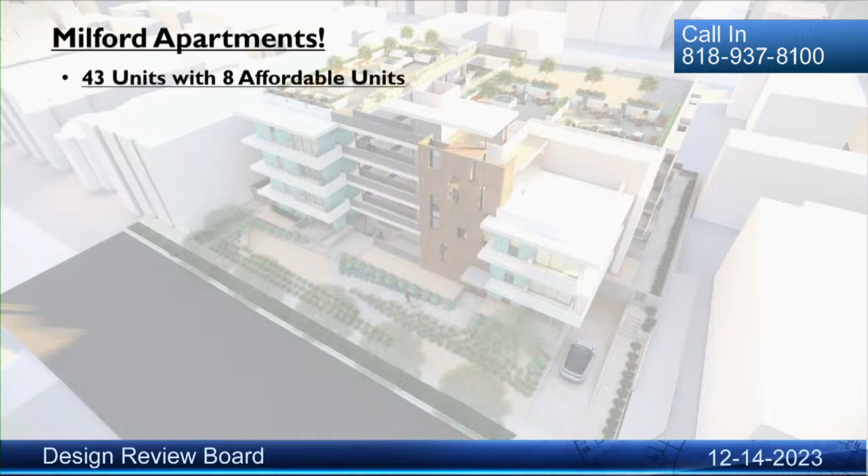So this is a 43 unit project with 8 affordable units. We can talk about the increase in density, what we did, and what we ended up doing to account for the additional number of units we were able to add.

Parking. We provided parking even though, right when we were getting this approved, AB 2097 was in effect — I don't know if you're aware of that. So we could literally remove parking entirely and just provide bike parking. But we decided that as part of the development, to bring more value, we added parking.

The notable facts about this project: it's architecturally significant design. I want to be proud of the project, since I'm very much involved with numerous multifamily ED1 projects — what we call ED1 in the city of Los Angeles — and a lot of the 100% affordable units have zero parking, zero setback, they're very, very small, and the design and quality of materials are questionable. Here, we managed to create something significant to be proud of.

The scale and context relate to the surrounding multifamily structures. One reason I removed one of the units in the front was the scale along Milford. On the west side of the property it's a lower structure, whereas on the east side it's taller. So I put the 4-story portion on that side, then stepped back to propose a scale more proportional to the west building.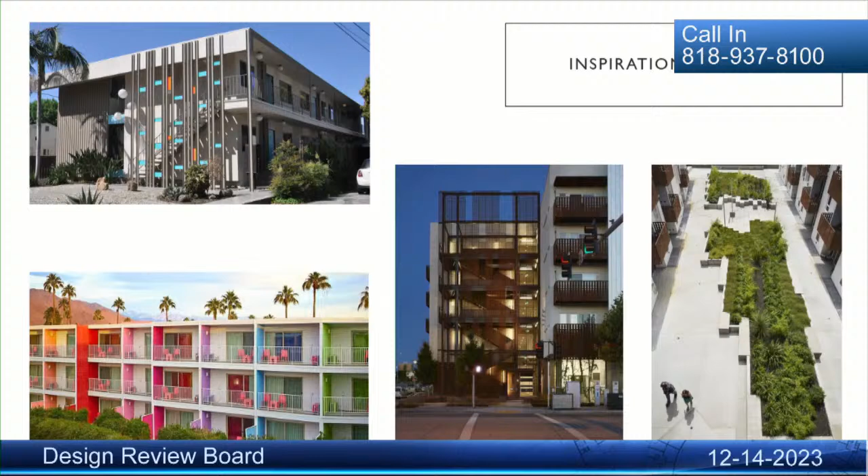For inspirational images, we brought in some mid-century architecture that I'm very fond of, trying to reduce the scale and massing of the 4-story building. There's open area for the public on the deck level, as well as an open staircase with articulation, excitement, and movement that the units will present to the surrounding neighbors.

Also color — you can see that on the west end it's lower in scale, stepping up to the elevator, and they are connected with bridges. We managed to create a sense of a nice entry in the front.

We believe the ramp is eliminated by a sloped walkway that's graded so we don't have an obvious handicap-accessible ramp at the entry — we've managed to hide that in the landscape area. We worked with the landscape architect on that, as well as the drought-tolerant landscaping, and massaged the front end of the design. Next, please.

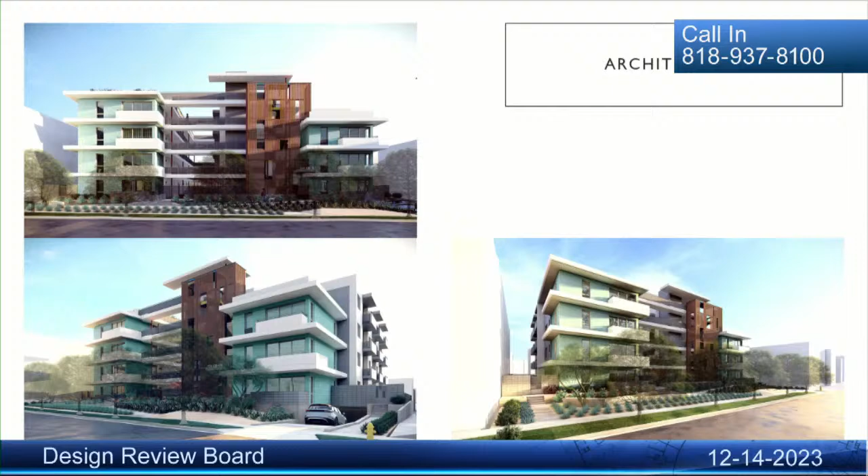One of the items we need to highlight is the landscape around the perimeter of the building. We've created a setback of the parking structure, so all the landscape will allow mature trees on grade, for better development and maturity, along with the setback for the structure itself. You can see that on the sections.

The roof deck is an important part of this project. We were able to get open space on the roof, which we will encourage people to use, rather than the ground level open space previously encouraged.

Again, landscaping, drought tolerant plants, and some trees. Palo Verde is one of my favorite trees, so I made sure to get those into the project. I will always have those.

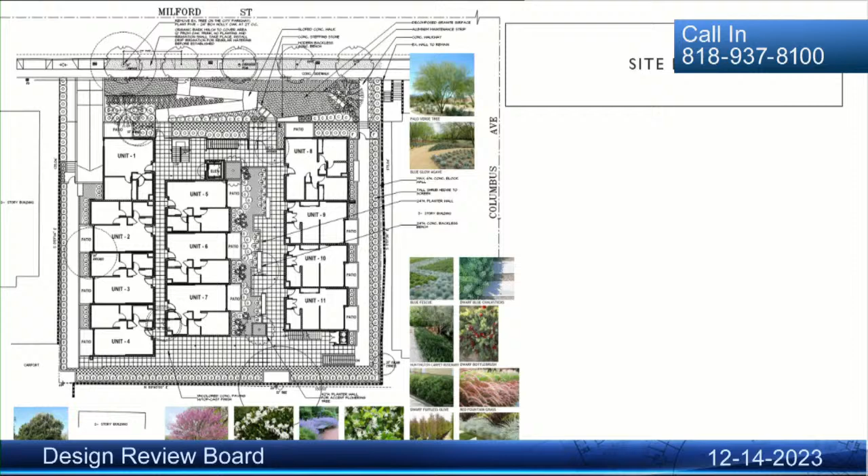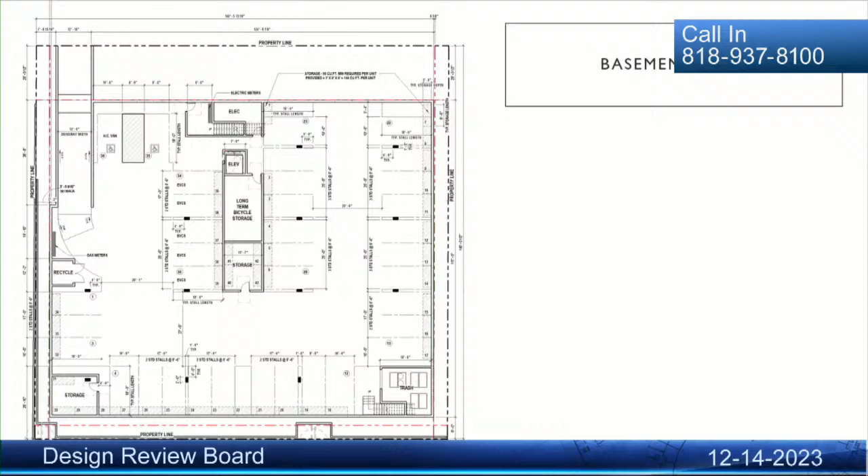Underground parking is designed around long-term bike parking. We have adequate storage for residents, as well as 36 parking spaces.

The step back from the rear, as well as the articulation on the facade, but the repetitiveness of these units stacked on top of each other will create big savings in the development, hopefully savings that will help us build.

The 4th level would be the roof deck, an open space. I've left that open, more for units on that floor rather than encouraging people from every floor to use it.

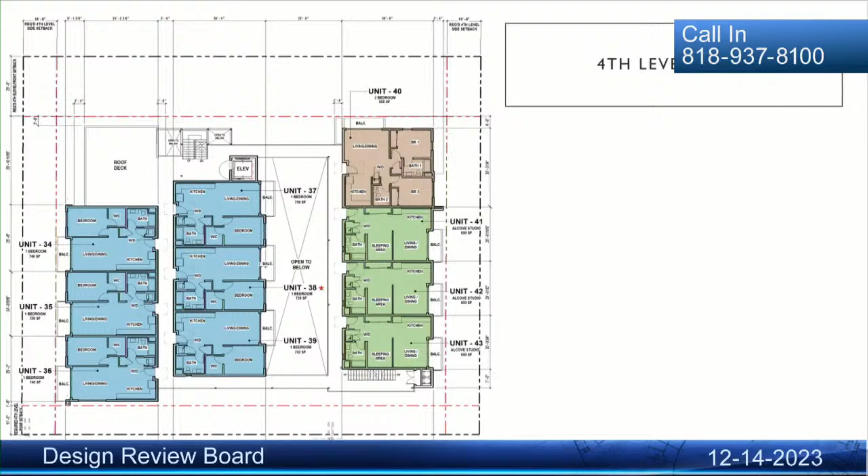I was hoping the 4th level would have that extra small area people could actually go and use. We weren't planning to put any planting there; we wanted to concentrate waterproofing, planting, and decking on the main roof. If I do add something there, it would mostly be open space for people to gather, maybe with pots, though I wouldn't want actual built-in planter boxes because of the waterproofing concentration and requirements on the roof.

On the roof we've allocated solar panels, even though we could eliminate that requirement through other green measures, but we are going to propose and provide solar.

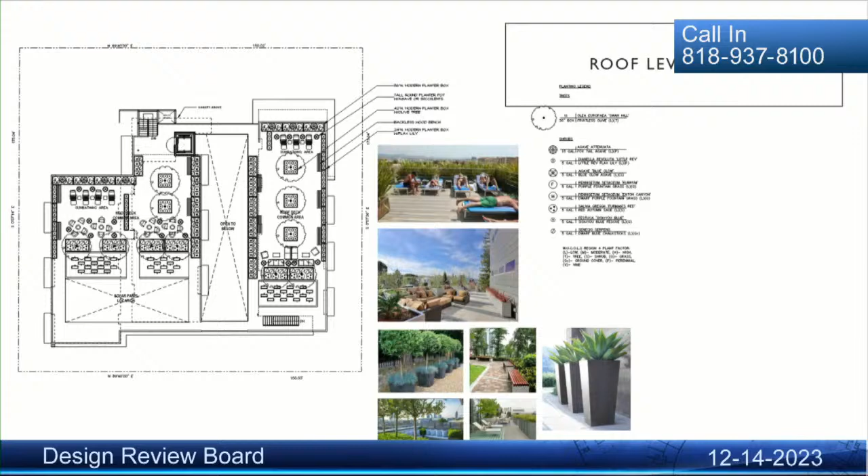All units will have their own independent AC units, probably ductless, as well as the open garden area that will be open for people to use daily.

The materials we have—originally the green was a project I was inspired by in Santa Monica. It was originally clad with copper, but because of the weather there it patinaed and turned green, which was the inspirational color. I don't know if we can afford patinaed copper for this project like the original, but that's where the inspiration for the color comes from, so we'll try to match the color as best as we can.

We are using corrugated steel metal, more of a rusted material—I've lost the name for it, there's another name for it, I forgot.

The detailed railings, a stacked burnished block, and the stucco with a variety of different colors will hopefully encourage and create some excitement for the project itself.

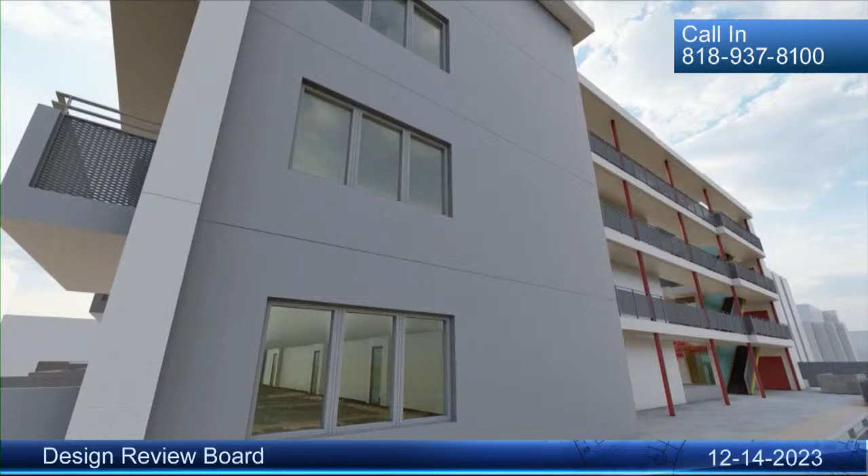This gives you a bit of perspective of what you would see around, and the recessed parts introduce some color. I tried to minimize windows along the south facing side, and all circulation happens along the back of the building as open circulation.

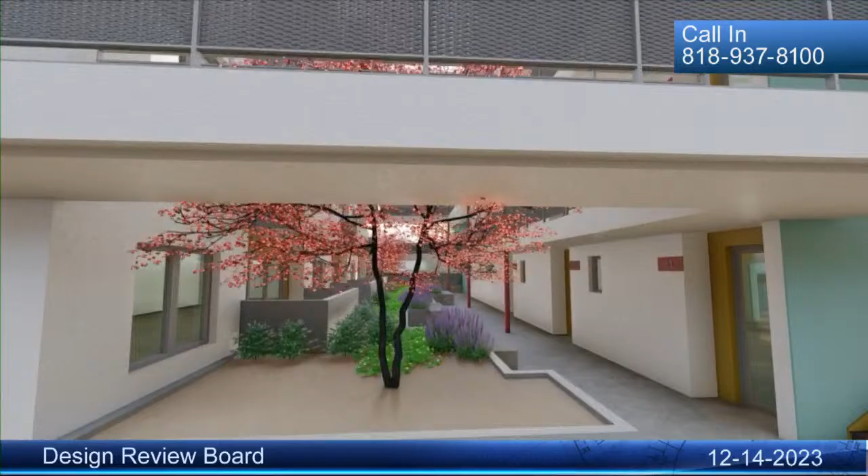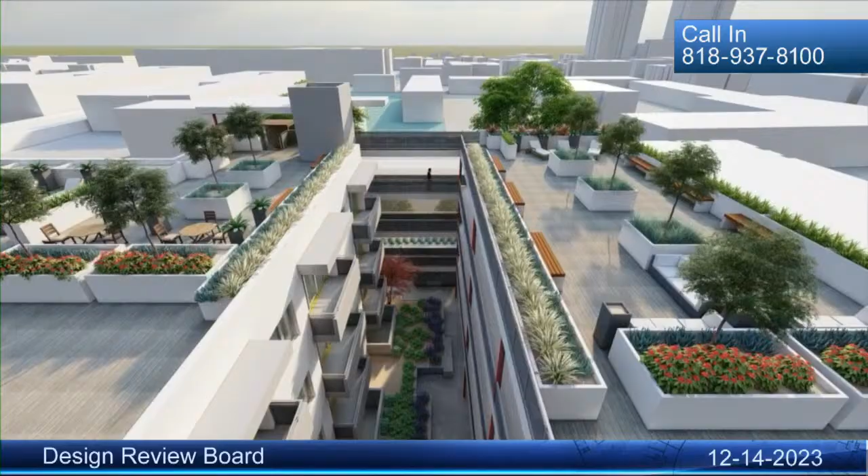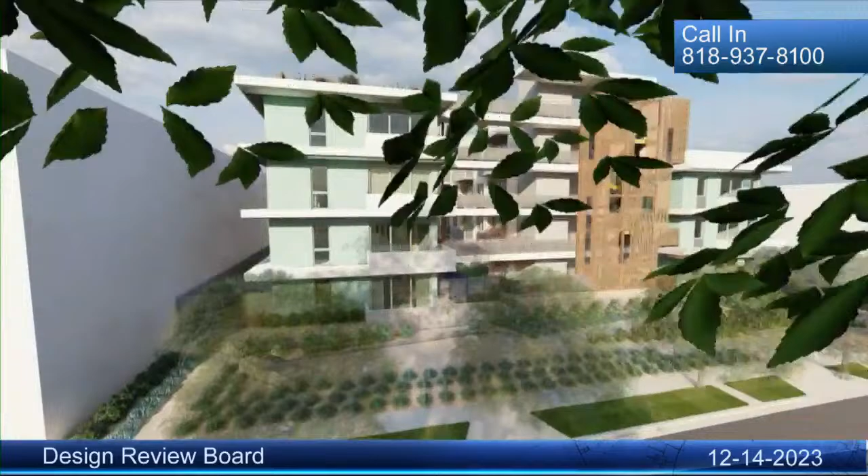And outdoor area, and then you have the roof-covered area for the elevator and the stairs, which is open again, similar to the rear. So next, yeah, this kind of gives you the actual perspective of that.

So going down the list, I wasn't able to download the conditions, but I have no problem. These are definitely a must for us to provide, so I have no problem with the conditions.

I read the two emails, thank you for forwarding. One of the emails had to do with parking and the development and the increase in the condition, or their concern was that the development does not have enough parking. If you provide parking, you're overbuilding, you have to basically excavate extra, and then we can't afford the affordable project.

Again, as I started my presentation, we could have exercised AB 2097. It's given, eliminate parking altogether. Again, we meet that as well. But we decided to come in the middle and provide some parking, some bike parking, and try to provide as best as we can to most of the units. How that's going to be programmed is going to be up to the management and how they decide who's going to get that. That I'm not going to get involved in.

Another neighbor's email had to do with the development of four stories blocking view. Obviously, we all know that there's no ordinance on view blockage. They were also concerned about light and sun. Well, the structures are on the north, so obviously we're not going to get any shadowing from the building to the south. Everything will basically come from the south, from the buildings to the south.

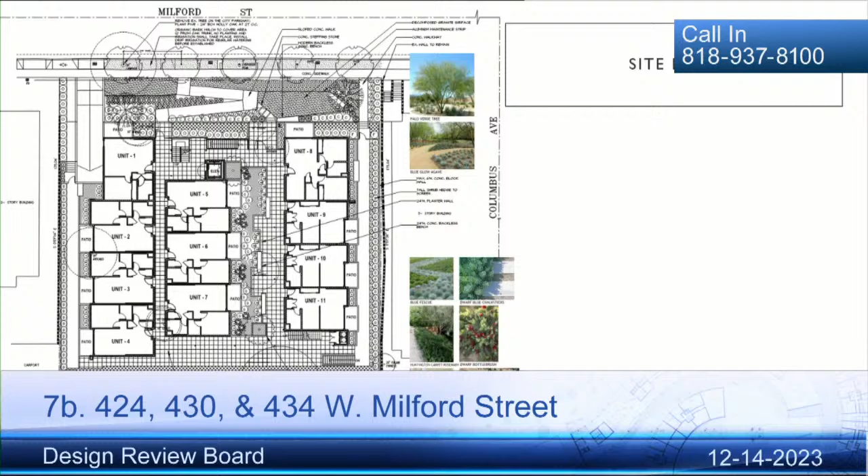Yeah, that's fine. So if you look at units 5, 6, 7, the landscape covers around the patio, and units 8, 9, 10, and 11 are the entrances for those units. So keeping the walkway open to enter into the units, I felt that's going to be the main circulation. Whereas if I made it like my inspirational example, we actually started with that, but then decided that rather than having people walk in front of the patios and living rooms, it would be better to landscape in front of that.

I ask because that space is fairly narrow and quite tall. I agree and hear you, but I'd rather have the landscape against the patio and a bit more privacy in the middle units than have people walking in front of them. That was the only reason.

Since you don't have one parking space per unit, what's the plan for how parking gets allocated? Are you going to decouple the parking? Technically, that's a conversation we need to have. We need to figure out a game plan, something fair, not discriminative, something adequate enough for everyone, maybe first come first serve. It is tough providing.

It would have been much simpler to say here's your apartment without parking, that's your rent. I'd encourage charging separately for the parking, with some accommodation for affordable units. Decoupling parking when you don't have sufficient spaces for every unit may be the solution. But I don't want to commit without understanding the legal ramifications of providing, not providing, charging, or not charging. That's something we'd have to consult with someone about.